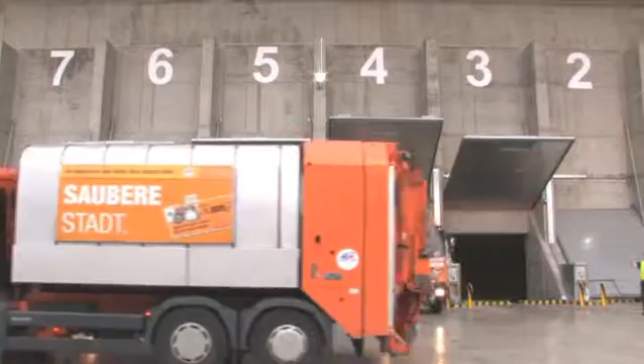Waste management is an aspect in the function of a city that cannot be overlooked, but normally takes place off the beaten track of the tourist attractions. The new waste incineration plant in Pfaffenau can, however, be seen as a new place of interest in the sense of active environmental protection, and is an important step towards securing sustainable living quality in Vienna.

In Austria, it is forbidden by law to deposit residual waste untreated on dump sites. With the new waste incineration plant Pfaffenau and the incineration plants that exist already, Vienna assures that residual waste is treated properly and is furthermore converted into valuable energy in the form of electricity and district heat.

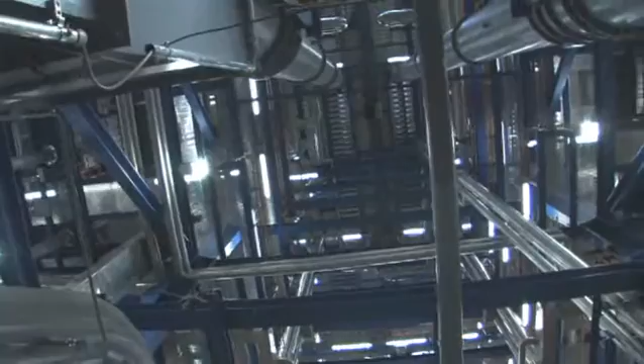The standards of the plant that was to be newly built in the environmental center Simmering were very high from the beginning. It should result in the emergence of a high-tech plant for the protection of the environment. In addition to highly functional demands and licenses in an environmental impact assessment procedure in accordance with the strictest environmental standards in Europe, it also had to be suitable to architectural and aesthetical aspects.

The design of the project is the result of an EU-wide architecture competition. In a construction period of less than 3 years, one of Europe's most modern waste incineration plants came into existence, the WIP Pfaffenau. The Viennese waste management concept is based on 3 basic principles: prevention, separation, and utilization.

The best waste is, of course, the one that is not produced in the first place. This is why the main focus, in addition to prevention, is on waste separation. Thus, more than 330,000 tons of waste and biogenic waste is separated annually in Vienna.

It is divided into used paper, white and colored glass, metal, plastic, organic waste, and other waste. Only the waste that cannot be recycled requires proper treatment, and incineration is most suitable for this.

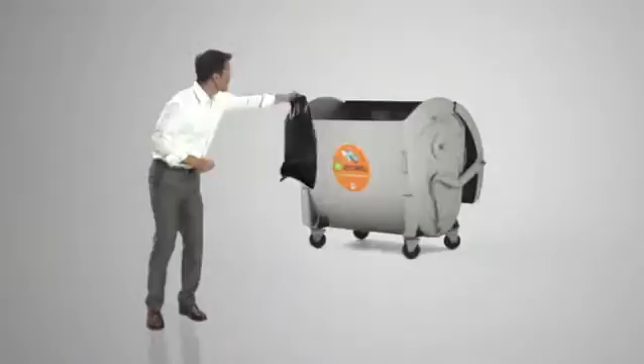Now, how does this container get to Simmering? I'm sure you've heard of the Men in Orange.

With more than 3,500 employees, the MA48 is one of the biggest municipal departments in Vienna. In addition to street cleaning, snow clearing, and the municipal fleet of cars, it is especially responsible for waste management.

365 days a year, the employees of MA48 go to great lengths to keep the city clean and to collect the waste that every individual has produced. The journey to Simmering can now begin.

The transport of the non-recyclable waste to the plant takes place with collection vehicles from MA48 mainly via the highway. Roughly 770 tons of waste are delivered daily.

Now a special kind of relay begins. When entering, the waste collection vehicle is weighed and after approval by the traffic light can drive to the tips of the waste bunker. A total of 12 tilting spots are available for the valuable load.

The tips are equipped with flaps in order to prevent smell and dust disturbing the surrounding area. These are only opened during the emptying procedure.

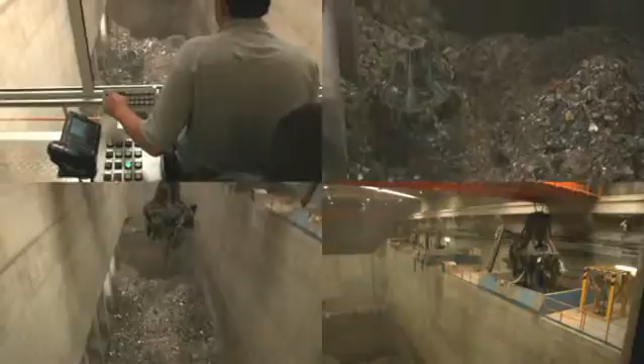This is the crane operator's territory. He controls the undisturbed procedure in the waste bunker, makes sure that the waste is well mixed, and navigates the waste crane with a smooth touch towards the incineration charging bin.

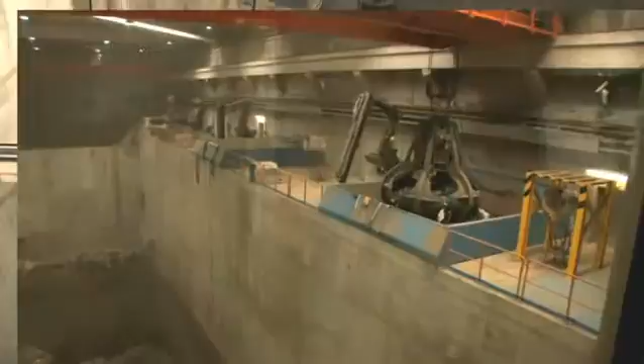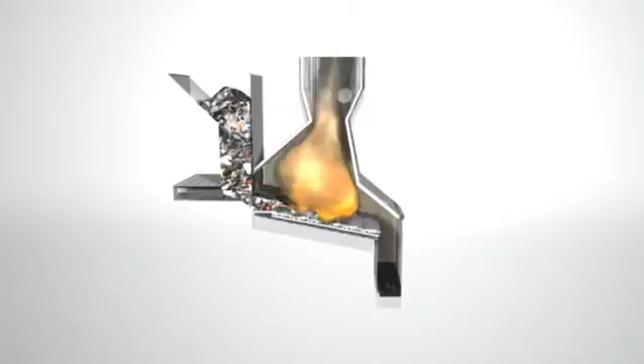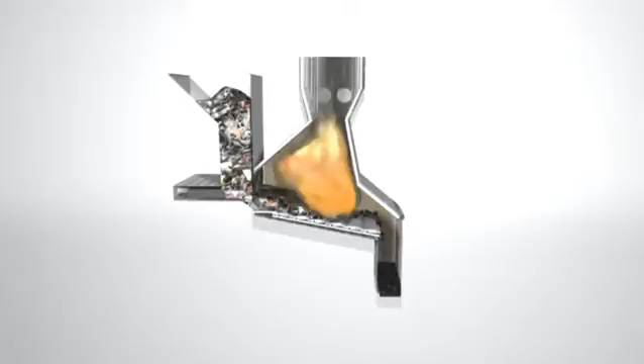Now it is going to get really hot. The burning waste is transported downwards by slow pushing movements of the grate. The air necessary for combustion is fed through the openings in the grate as well as directly into the incineration chamber. The firing temperature in the flame rises to more than 1,000 degrees centigrade.

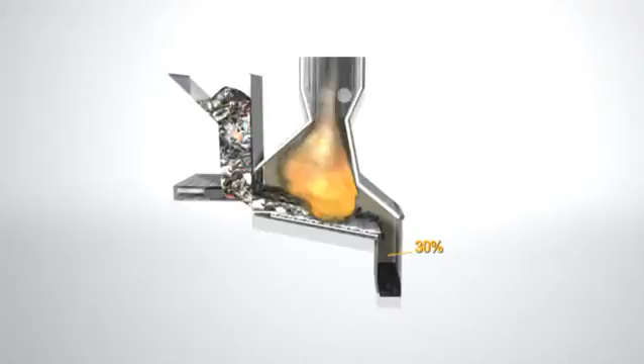After roughly 1 hour, the combustion process is completed. Approximately 30% residue of combustion, consisting mainly of non-flammable elements like slag, ash, scrap, and stones, accumulate on the grate side. The residue of combustion must be further treated.

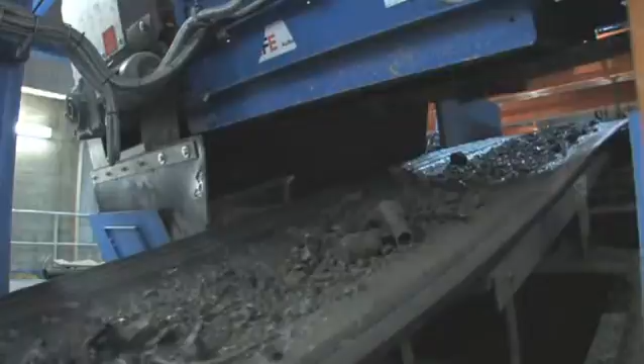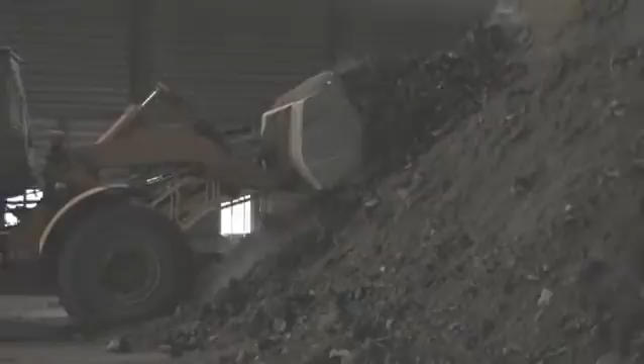The scrap is separated with the help of metal separators and is used in the metal industry. The slag is solidified together with the ash into ash slag cement in the waste treatment plant Vienna, which makes the environmentally compliant deposit in the city's dump site possible.

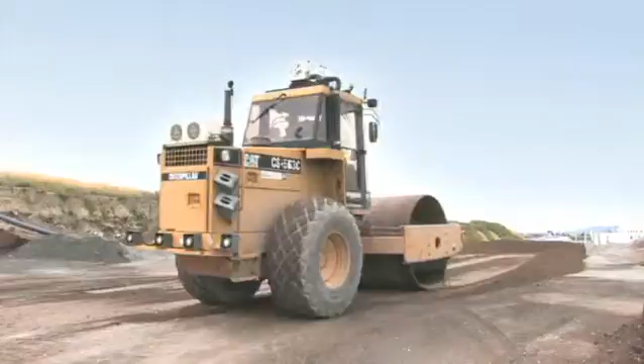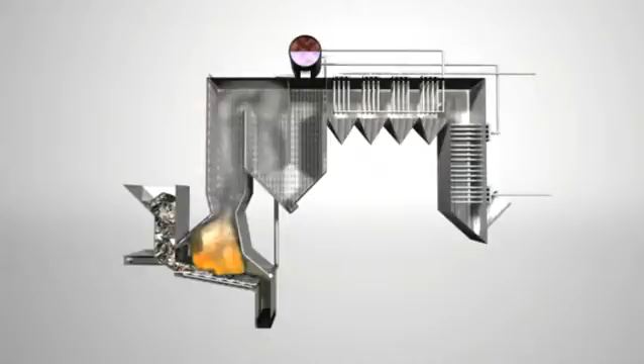Let's return to the plant. Now an 850 degree centigrade heat wave climbs up the waste heat boiler. Here the heat energy from the hot flue gas is transferred to the water in the boiler.

The flue gas successively flows through the various components of the waste heat boiler, the so-called flues. In the first part, the empty flues, the walls are equipped with pipes. The boiler water circulates in them. The flue gas delivers the energy to the water, whereby this heats and rises to the top and the flue gas is cooled.

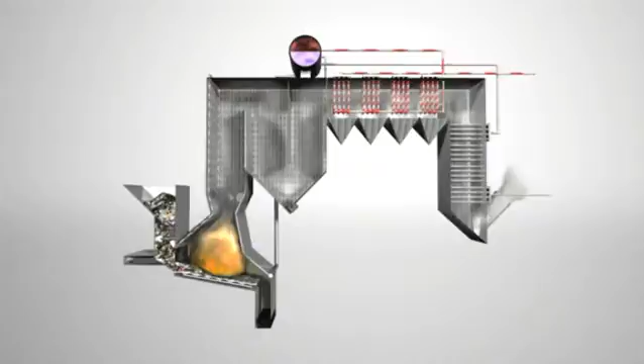After the empty flues, the second component follows: the boiler flues. Additional contact heat surfaces are deployed here. The preheated water is channeled once again through pipes and thus repeatedly heated until it evaporates. The steam created is the basis for the production of energy.

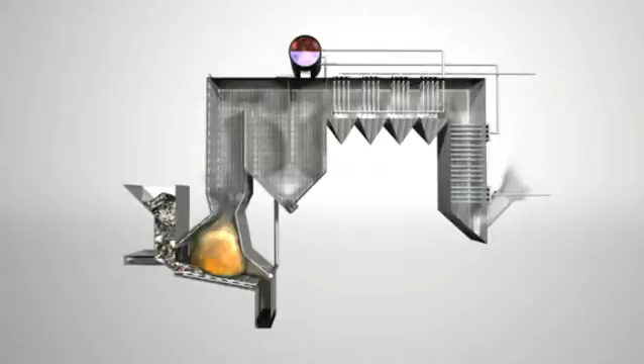More about this later. The flue gas has cooled down step by step from the original 850 degrees down to 250 degrees centigrade. The last component is the economizer. The remaining temperature is used to preheat the water in the boiler. Thus, the energy is used to a maximum.

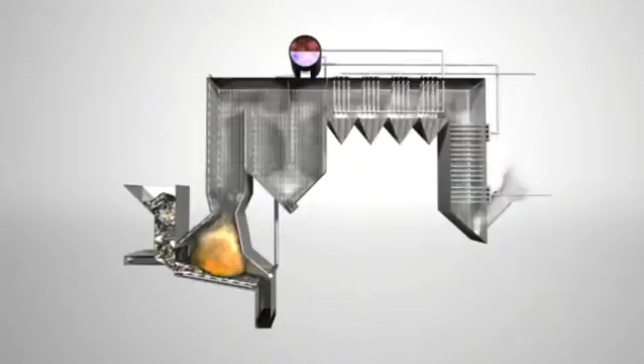The ash accumulated in the waste heat boiler is collected in funnels and deposited in the ash silo. The steam developed in the waste heat boiler is used for the production of electricity and district heat.

The steam drives a turbine and thus generates mechanical energy that is furthermore converted to electrical energy in a generator. This is then fed into the public electricity network. Hence, 25,000 Viennese households can be supplied with electricity.

The steam taken from the turbine is used for the generation of district heat. It condenses to water in a heat exchanger and delivers its heat energy to the district heating network of the city of Vienna. This energy covers the heat demand of 50,000 homes.

By using the heat energy that develops due to the thermal handling of the waste, the degree of efficiency is 76%. Parallel to the extraction of energy, the fight with the flue gases starts now. This fight lasts for 4 rounds.

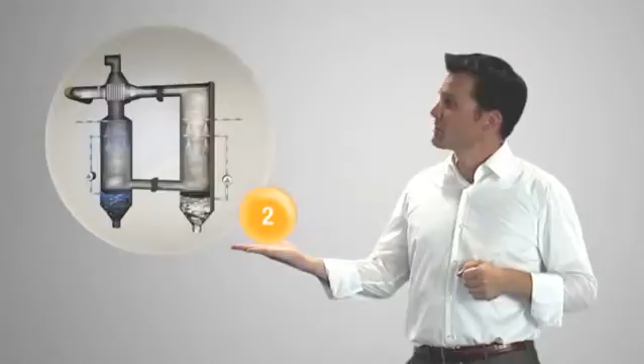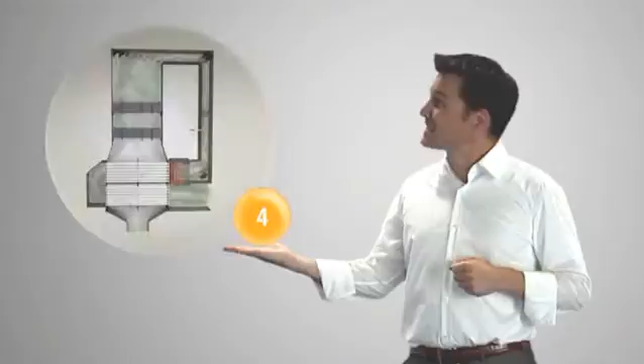First of all, there is the electrostatic precipitator. It is used for the removal of dust. In round 2, the toxic acids are rinsed out of the flue gas in a 2-stage scrubber. Round 3 starts with the active coke filter for the separation of organic toxics. The fourth and last round takes place in the catalyzer, where the nitrogen oxides are removed.

But let's have a look at this now in detail. Let the fight begin. Round 1: the electrostatic precipitator.

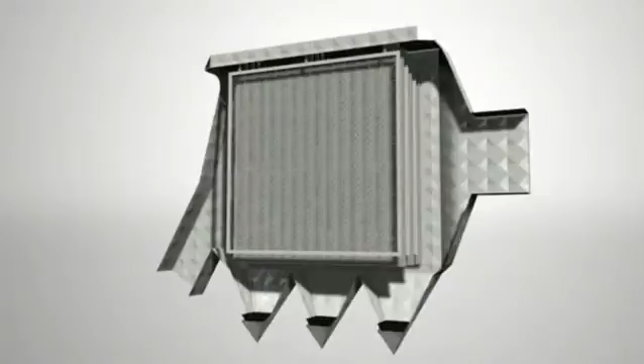The flue gas coming out of the waste heat boiler reaches the electrostatic precipitator. Here, plates and frames are alternately mounted. Emission electrodes under high tension are placed in the frames.

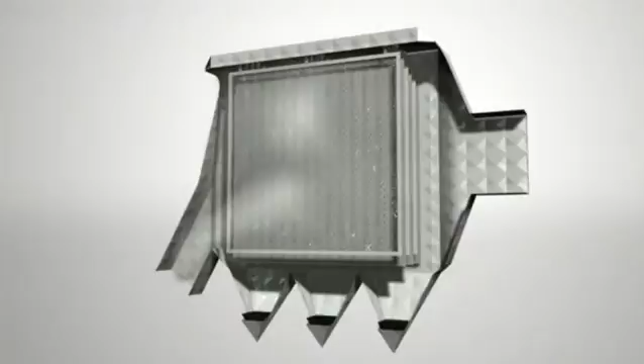The flue gas flows through the electrostatic precipitator, and the dust particles floating in the gas are electrically charged by the emission electrodes. Under the influence of a high-voltage electric field, the negatively charged particles of dust are attracted to the positively charged plates, the so-called precipitation electrodes.

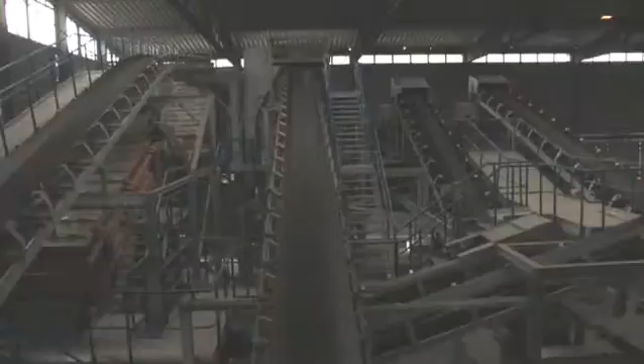In order to clean, the plates are made to swing mechanically, whereby the dust falls into the collecting funnels underneath the electrostatic precipitator and is transported from there to the ash silo. After further treatment, the ash is also deposited together with the slag on the city's dump site.

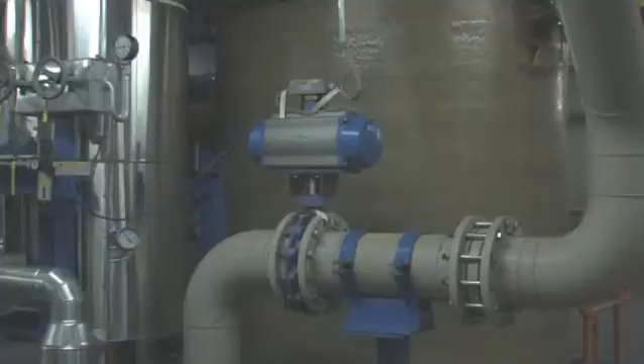Round 2: the wet scrubbers. Time for a shower. The basic procedure in this cleaning round is the rinsing of toxics with water and lime milk.

In the first scrubber, water is sprayed in by jets. In the process, chlorine and fluorine compounds, but also heavy metals, are washed out of the flue gas. In the second scrubber, lime milk is sprayed in instead of water in order to separate the sulfur dioxide. The lime milk reacts with the sulfur dioxide to a gypsum suspension that is continually extracted from the scrubber.

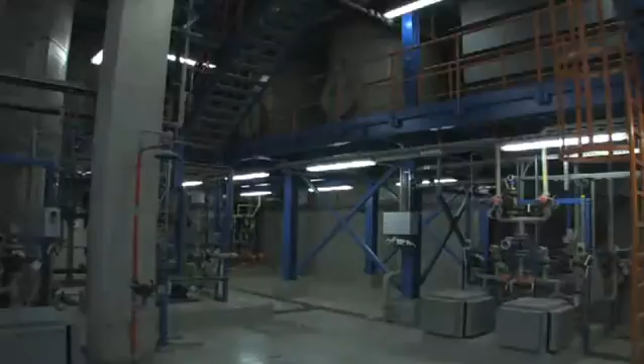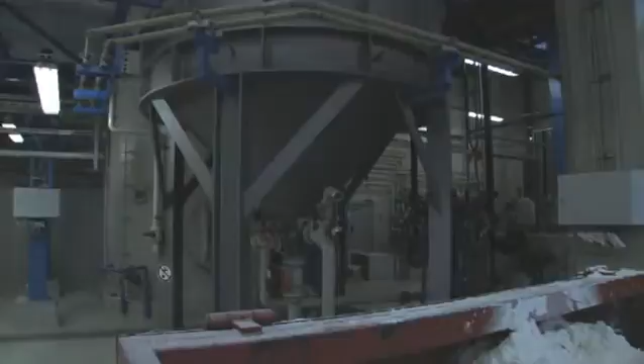The washing water is cleaned by the plant's wastewater treatment and then subsequently fed to the main wastewater treatment plant in Vienna. The solids that remain after the wastewater treatment are the so-called filter cake and gypsum. The filter cake is deposited underground. Gypsum can be processed for use in industry.

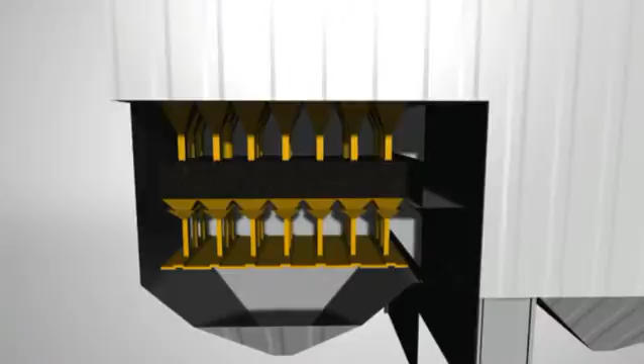Round 3: the activated coke filter. Off to the coke chamber. The cleaning principle of the active coke filter is very simple. The flue gas flows through several layers of special brown coal cokes, and the toxics can accumulate on them.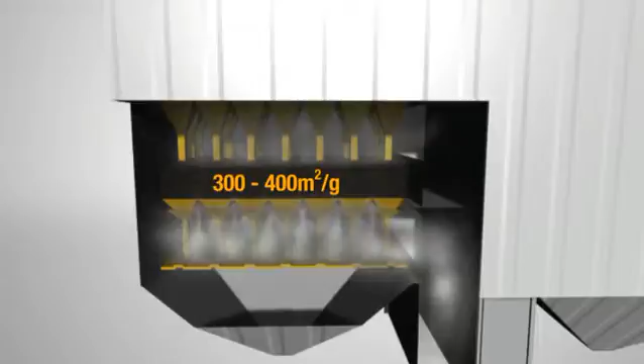The coke used has a multitude of fine pores with a surface of 300 to 400 square meters per gram. This is equal to the size of about 1.5 tennis courts. This fine pore system is especially suitable for the adsorption of gaseous toxics and very fine dust particles.

Because the adsorbency of the active coke is depleted after a while, the used active coke is continually replaced by fresh coke. The used coke is incinerated.

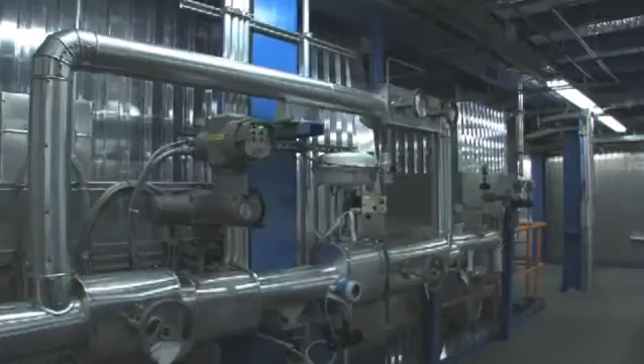Round 4: the Denox unit. Now fast reaction is necessary. Unwanted nitrogen oxides are removed here.

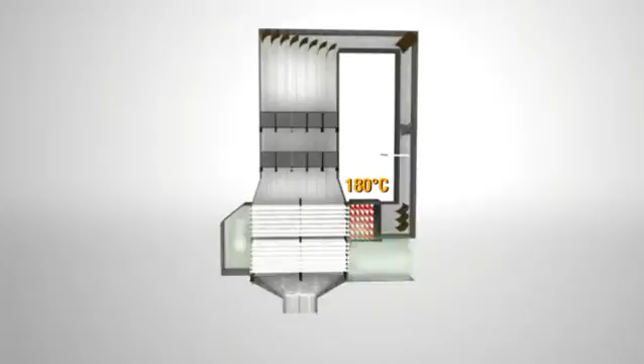Before entering the Denox complex, the flue gas is sent once again through a heat exchanger and heated to a temperature of 180 degrees centigrade. Now ammonia water is added to the flue gas by means of jets.

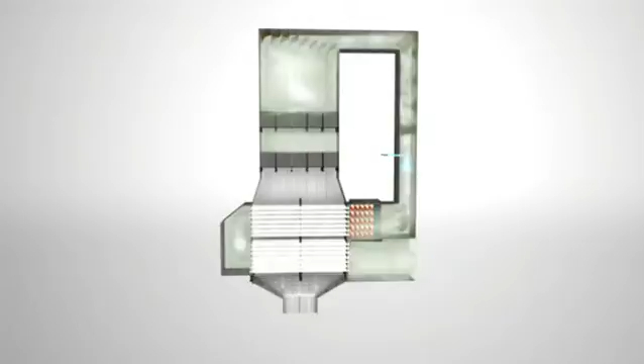After mixing well, it moves on to the catalyzers. These cubes made of porous ceramic have a multitude of thin channels through which the flue gas can flow. On the surface of the catalyzer, optimal conditions prevail for the chemical reaction that allows the mixture of nitrogen oxides and ammonia water to become harmless nitrogen and water vapor.

At this stage, the flue gas cleaning is completed, and the pure gas is dispersed via the chimney at a height of 80 meters. The clean combustion air that leaves the plant is put through a stringent test. Samples are taken at 2 test points in the chimney, so the quality of the flue gas cleaning can be continually checked, and the result is not bad at all.

The new WIP Pfaffenau is 90% lower than the allowed limit for dust exposure. The WIP Pfaffenau is therefore another substantial contribution to extending Vienna's leading position in protecting the environment.